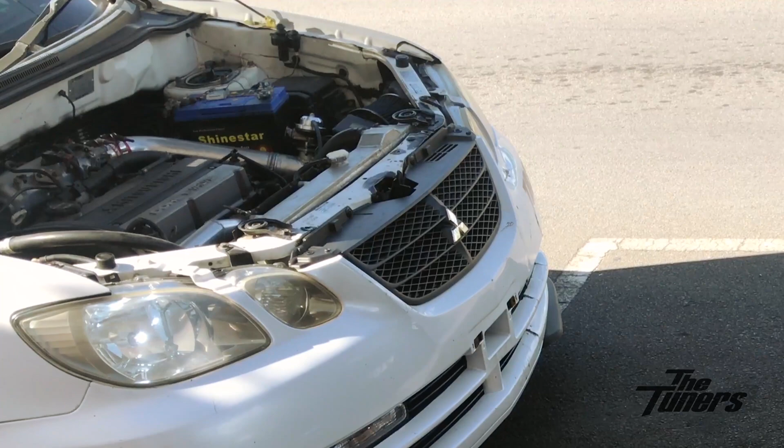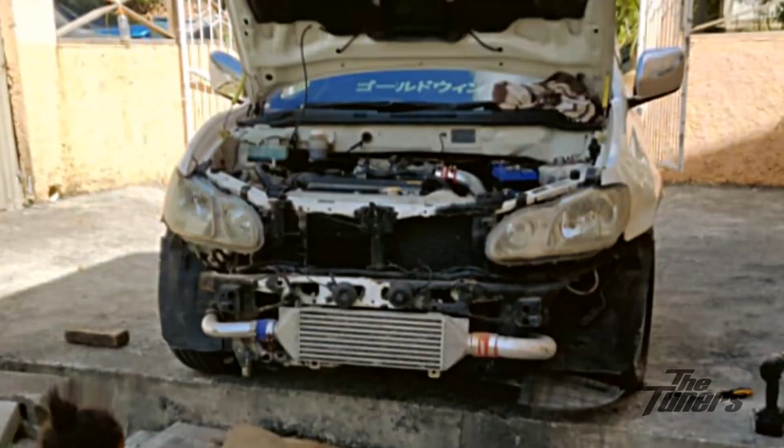Goldwin Phillips, and I own a small tinting company in Dominica, and this is my Mitsubishi Airtrek. I did a manual swap on it, the Evolution gearbox put in it, and super twin disc clutch on it, front mount intercooler. That's basically it for now with the mods for the car.

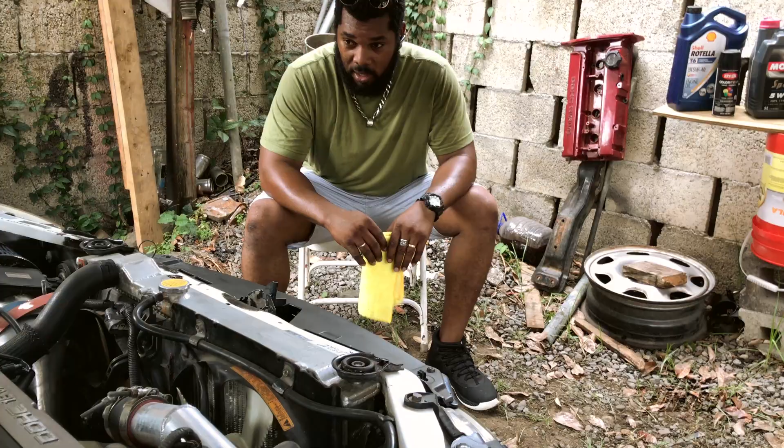The first car I owned was a Vauxhall Carlton. I got it modified. It didn't have the original engine in it. It had a Nissan L24 in it, straight six, and the transmission was giving trouble. So I got this Z24 gearbox to bolt up on the L24, and then I got the flywheel from some Nissan bus, and I just matched some parts together, and I got it to work. So I had to body firewall and made brackets and put the clutch pedal and so on. And from then, that car, I drove it until it died.

And then I came to the Corolla. I didn't have nothing really to do to the Corolla per se. I put in an inverter in it. Oh well, I changed the engine, it was too slow. It had a 2E engine in it. And I bought a rather old car and I took the engine, so I put a 1600 engine in it. So I come out 1300 and I go 1600. And I got the gearbox from the guys at Walsh, and I put it together. I've been playing the fool with that for a while, until I end up with this.

I bought it crashed and set it up, and while I was mounting it up, Edmond told me, boy, these vehicles, their transmission breaking a wave spring. Body work, I could have done that before, but the car wasn't driving long enough for me to do that. I was getting transmission issues. All the other guys did that same mod, and they're driving their vehicle every day. And my vehicle just telling me, yo, this transmission thing I can frustrate you. That automatic thing, that is not you. And it's like the car had a whole mission for me.

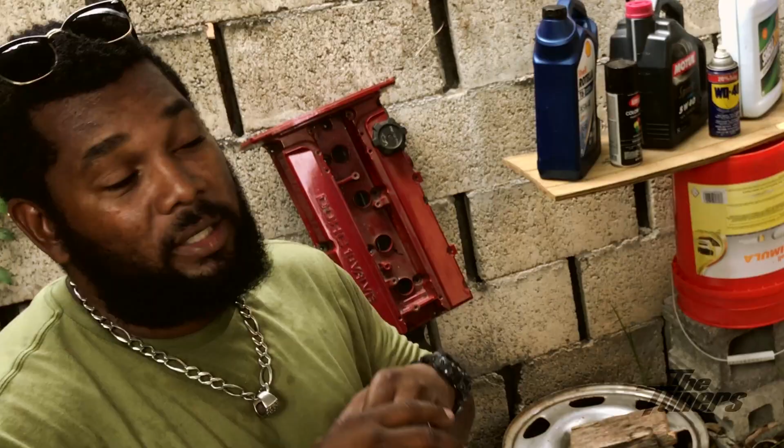So I said, well, the car done already, let me just take out the transmission. So I got Chad and his partner Joke, took out the transmission, brought it by a gentleman by the name of Blackamore, brought the planetaries and so on by Renix. They welded it up, put it in. The wave spring, I bought it, brought it by Black, put everything inside. The car worked fine, and maybe my driving style, I end up breaking the transfer case. Change the transfer case, car drive for a while, and then it started to make a noise again. Transmission come out, open it back. We met some burnt clutches in it, some gears or something broke in it. Got some parts from another guy, put them in, drive again.

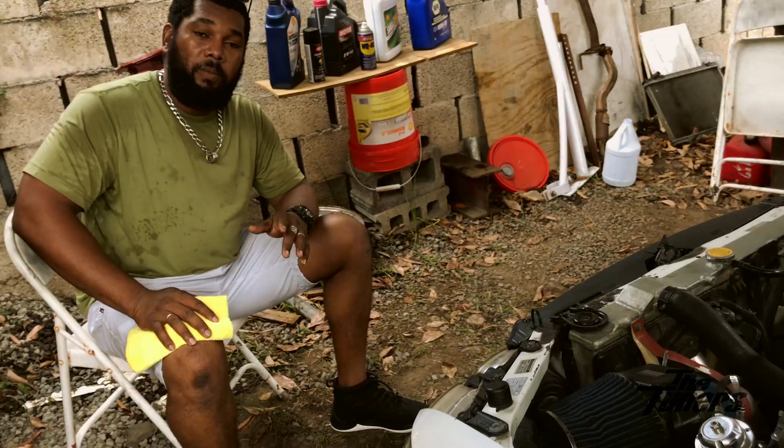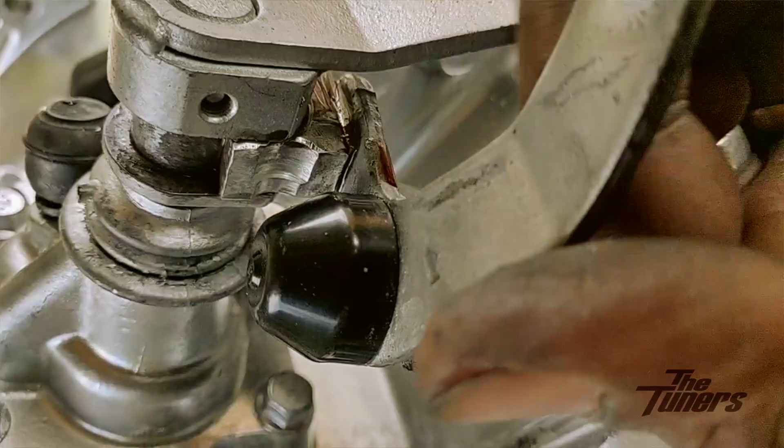I went down by the guy, pick up most of the parts, the gearbox, the flywheel, the axles. From there, jack up, and I start to take out. When I got the gearbox, it was missing a small part. Changing the gear, it pushes one of the forks out and push it in. Call the partner, say, boy, what are you really thinking? He said, boy, I don't get time to look for that now, but I'll find that for you, man. I say, you know something?

I know what that part has to do. I go in and make it. That being said, all that time is quarantine time and lockdown time. I'm home. I cannot go on the road to get nothing. I can't go by nobody to get nothing. So I'm just home and I have to try and use what it is that I have.

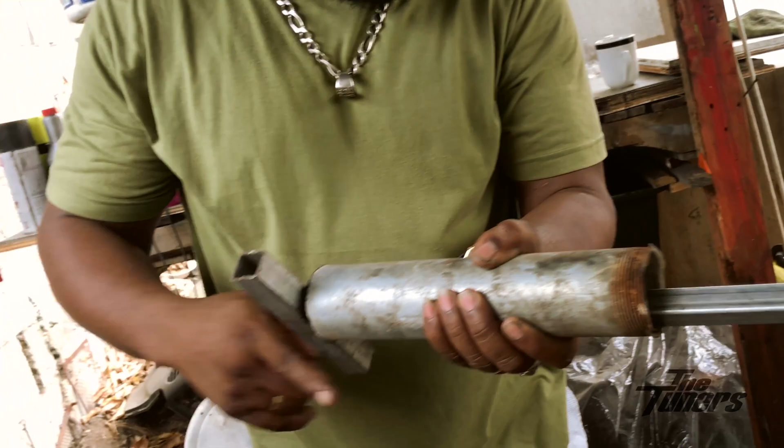Watch on the table there. Piece of transfer case there. And I measure it, it is the same height, but it's a piece of aluminum. I said, well, I don't have no grinder, I don't have nothing. All who have hacksaw, they far, I can't go for it. So I was trying to make it with a hacksaw, trying to make it with a hacksaw.

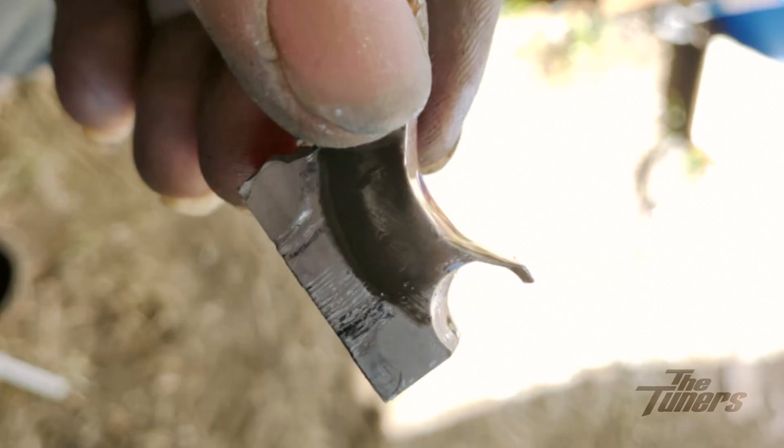And then I got some sandpaper and thing and I sand it down, and take the drill and put a piece of bolt in a piece of PVC and take sandpaper and wrap around the piece of PVC so I could give it a groove, because it had like a semicircle. It didn't come out like how the factory one was looking. When I placed it in position, it just worked.

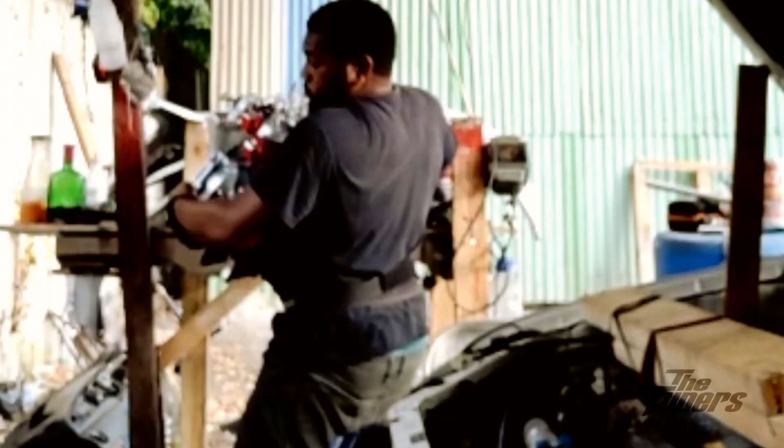But basically from there, clean the gearbox, hose down and spray down and get the clutch, put up the clutch, put the gearbox inside, mount up. Right, drive, drop down the car, put that in reverse here, take my foot off the clutch, and the car moving like it don't want to. I said, why is that like that?

While I was mounting the car, I noticed that when I was tightening the gearbox to the engine, I really had to put a lot of force on all the bolts. I had to tighten this side and then come and tighten this side so the gearbox could close evenly. And I wondered why it's so hard. Maybe it's that gearbox doesn't know that engine, maybe it's the mating process where the splines fitting in it may be a little tight, so maybe that was the case.

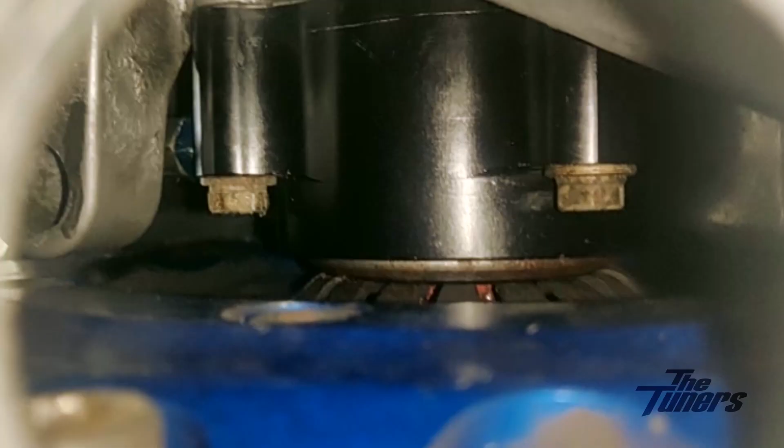But while I tested the car, I remembered all that, so I said, boy, what happened in there? That clutch slipping. And I start to blame the release bearing. Now the release bearing is hydraulic. It's the release bearing and the slave cylinder in one. That is the setup I got. There were people watching and I see the release bearing touching the clutch, like touching it. I have a neighbor on the next side there.

I said, boss man, I need to take out a quarter inch. He does woodwork, but he has a belt sander. I said, all you have to do now is just sand that down. I have to take out a quarter inch. The same amount I take out on the housing, I have to take out that same amount on the piston that's moving. I have to take out that amount on the shaft going inside it that the release bearing is on. I said, boss, I need that machined up.

He took out the quarter inch, I think. And I bring it back. It's too short. I end up going to Taro. And there's this guy down there who does have a lathe. So I'm telling him, I want to add back a quarter inch on that.

And in the afternoon I finish work early. I went down, I get it, I come back, I go call him. I say, hey, I get the part and that. He says, what happened now? I say, well, I mount it up this time now, you know.

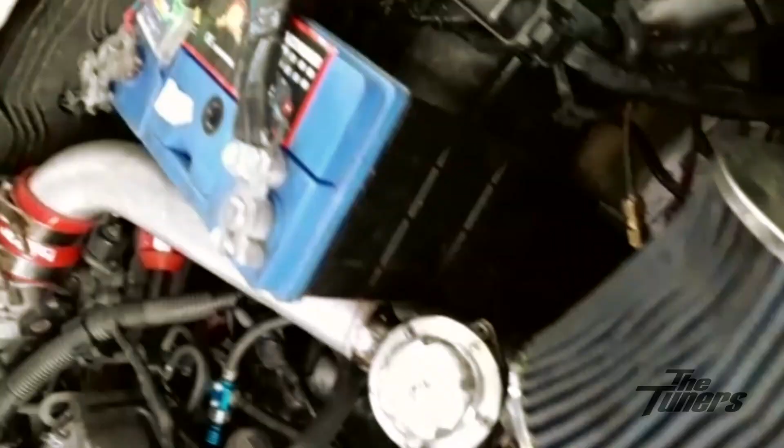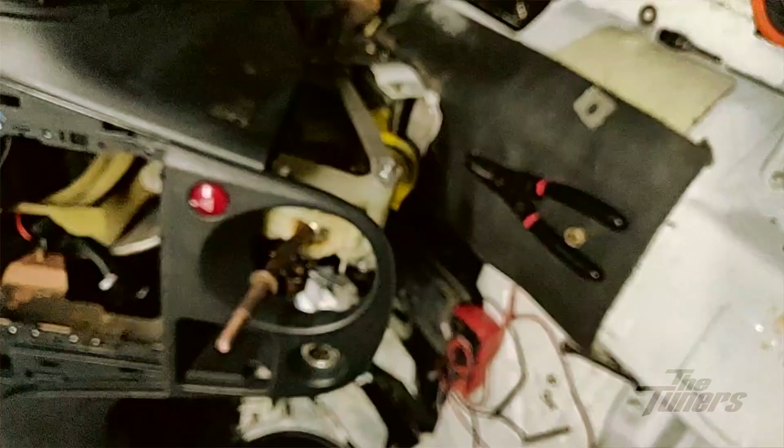So the whole placement of this gear stick, where it is now, was based on just 2 pictures and some Russian writing. I had nothing else. I studied these pictures like a forensic man, dismounted this whole area, looked in, watched my picture, rested the phone down and looked in again.

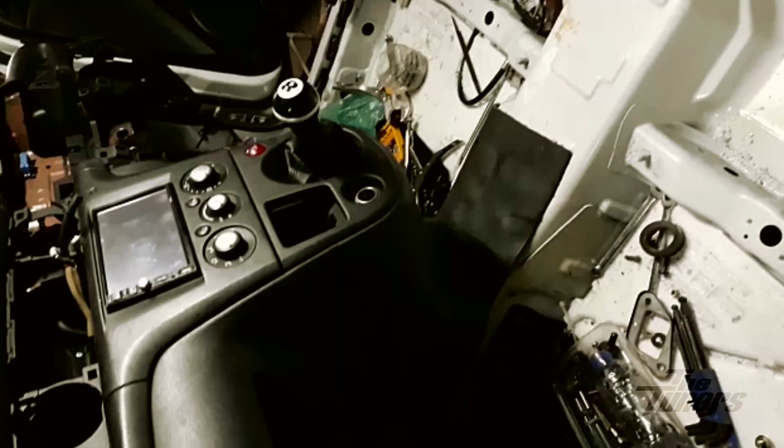I saw that piece of iron passing here, but this one doesn't have it, so that means they cut that piece of iron. I cut mine, put it up there, brace coming up there. I made a piece, a brace, and I have my brace there.

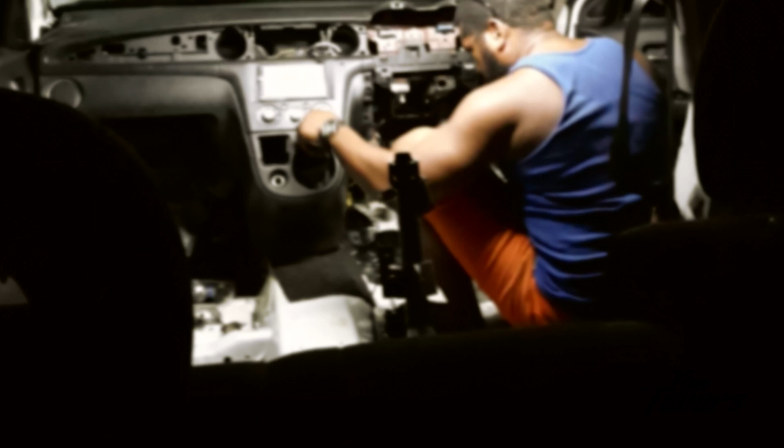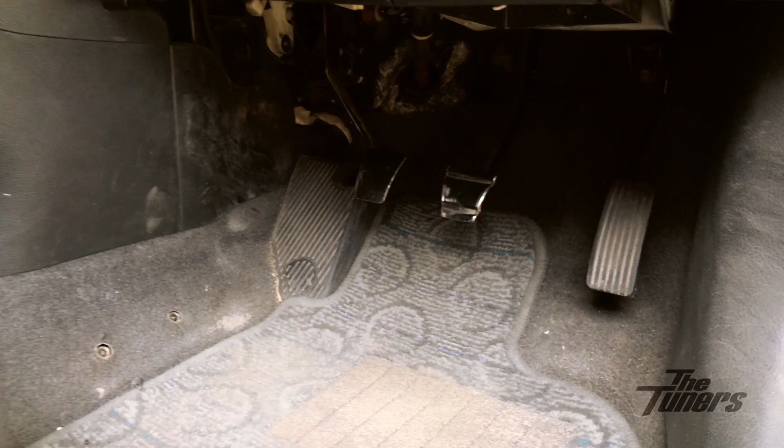I had to put back the dashboard. It was out to get to weld the brackets for the pedal and the brakes. So I used my same original brake pedal but cut from it, and the clutch pedal is there now. I measured it from the STI, the distance between pedals, and set everything.

This car has no indentations on the firewall anywhere - it was never meant to be a manual vehicle. So I spent about 3-4 hours measuring to make sure. I'd place the pedal, take a hacksaw blade, clamp it on the brake pedal and the clutch pedal, measure and place, measure and place. After almost 4 hours, I drilled the first hole.

I used the same mounting area where the parking brakes was. I bent a piece of iron and had a lot of welding to do - weld a bracket, bring it back up, bend the thing, drill and make the bracket to stabilize the clutch pedal.

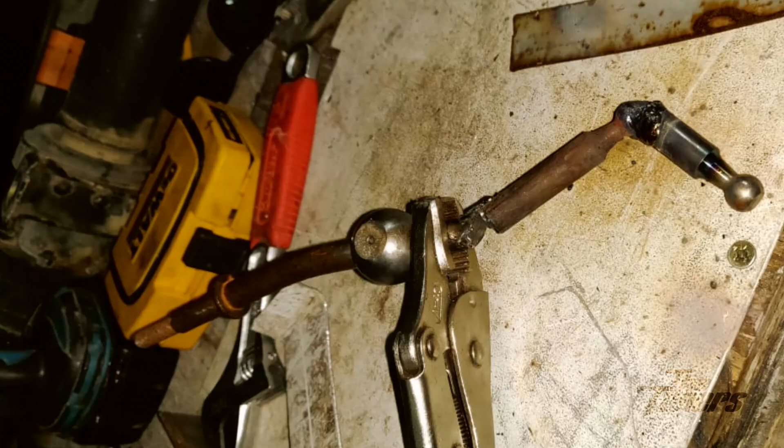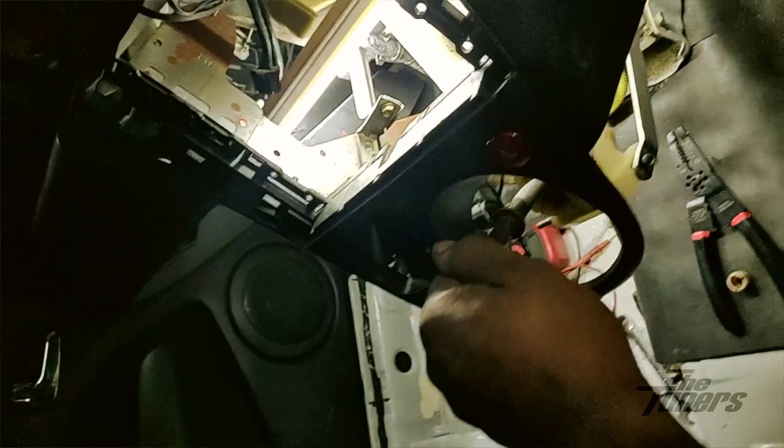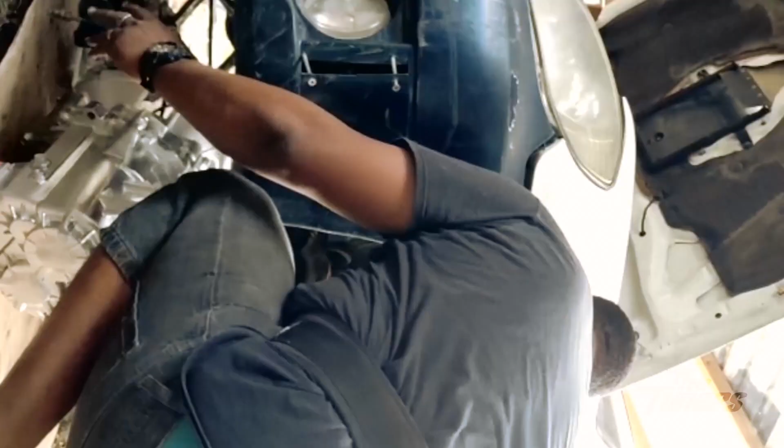And for under here, under there was a mess initially. I had to put the dashboard back up and place this so I could know where I'm at with adjustments. Because for this area, I only had 2 pictures - a side view and a straight view, and that's it. No instructions or nothing. So it was just the pictures and my brain.

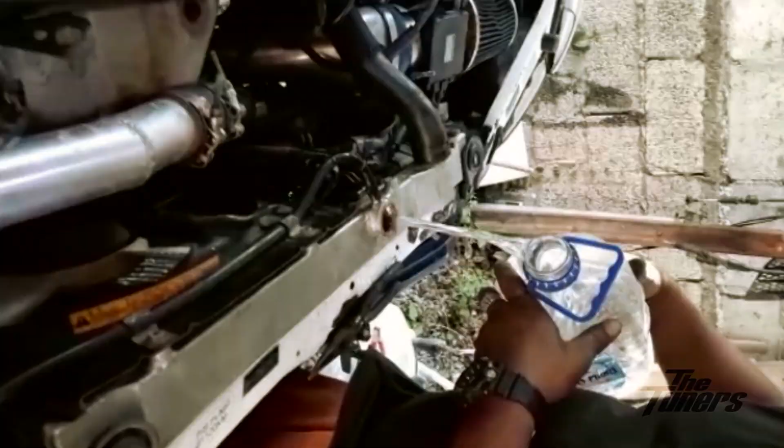When I placed the gearbox back on the engine block, it just made all my back teeth outside. I'm grinning like half a comb because I'm glad - that load off my back where I had to close and screw the gearbox together, it just fit together. So now it was just mount it up. I mounted it up, axle inside, put the transfer case, put my oil, and started the car.

With the stick outside, just from right there to right there, I wanted to go try it. I have this feeling of joy, I cannot understand myself, because I'm saying, what boy, this is still working, boy?

Drive off and make a turn, drive up here, pull the first gear. Drive down, come back up, pull the first gear there, pull the second gear. I said, what? Why does the car just feel like a whole new car?